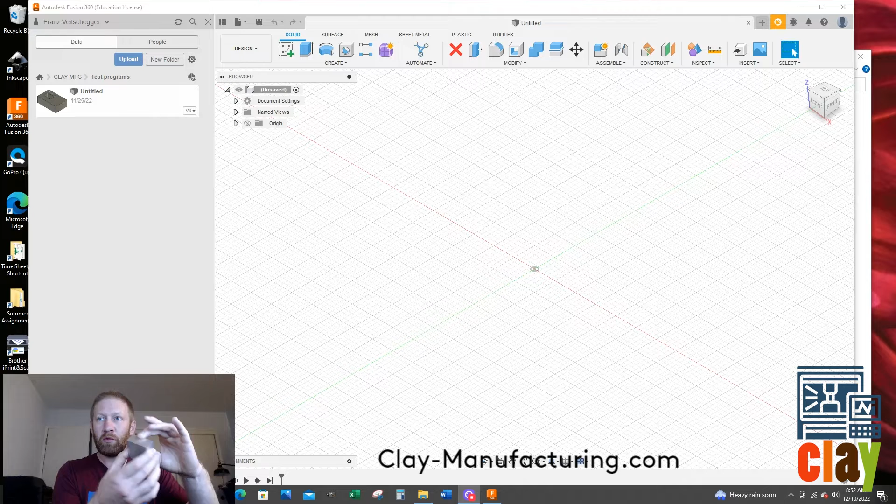And I will say this is an incredibly easy scenario because this is so thick. When it's thick, it's a square part. It's very cookie cutter. This is more about how to do it in Fusion and how to dial in the depth when I cut it on my Haas Mini Mill. And I'm going to do that all in this video.

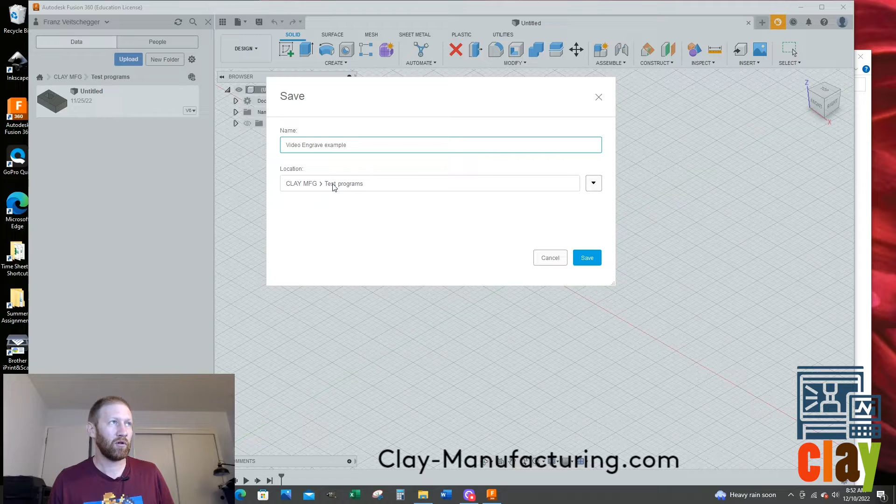So I have Fusion open. It's a brand new blank screen. The first thing I want to do is save it. So I'm just going to go save, and this will be video engrave example. And so this is going to be my folder with my test cut, my test programs, whatever. We're going to go save. So that's the first thing I'm going to do.

Now the second thing is I'm going to create a component. I'm going to come up here, right click and just say new component. And this will be, oh, come on. Computer was lagging. I'm going to say 2 by... we are still lagging. 2 by 2 alum block. Beautiful. Okay. So now I have my component.

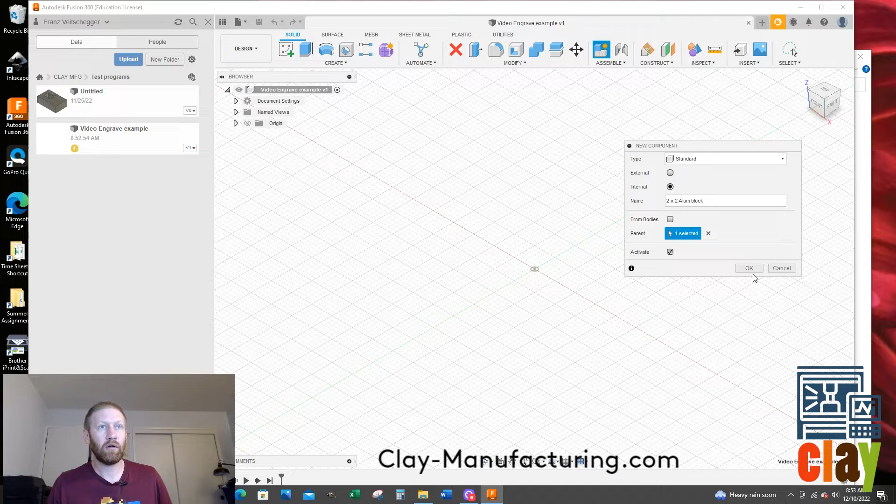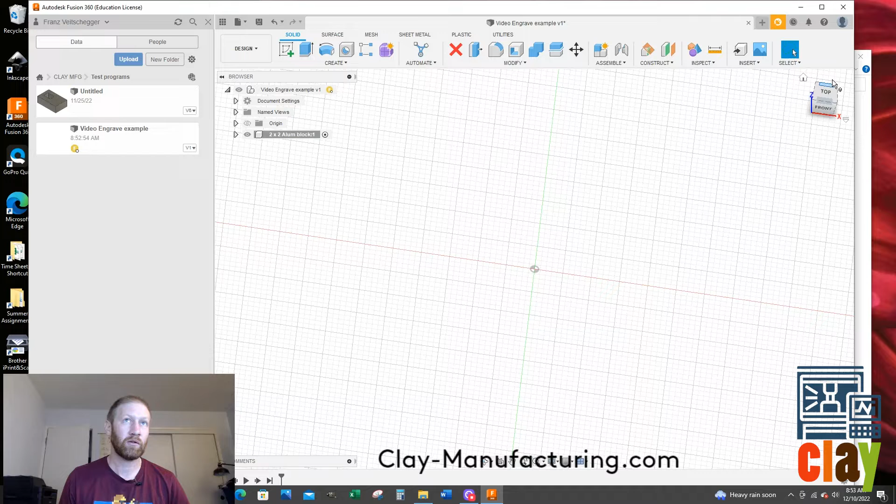It's active. The next step is I want to sketch from the top plane. This is for a 3-axis milling machine, so the spindle is coming down, so I want all my detail in the top plane. And notice I have my Z-axis going up, X is going right, Y is going positive. I clicked on my top plane. I'm going to come over here and click on my sketch. And I originally clicked on the view cube just to square me up.

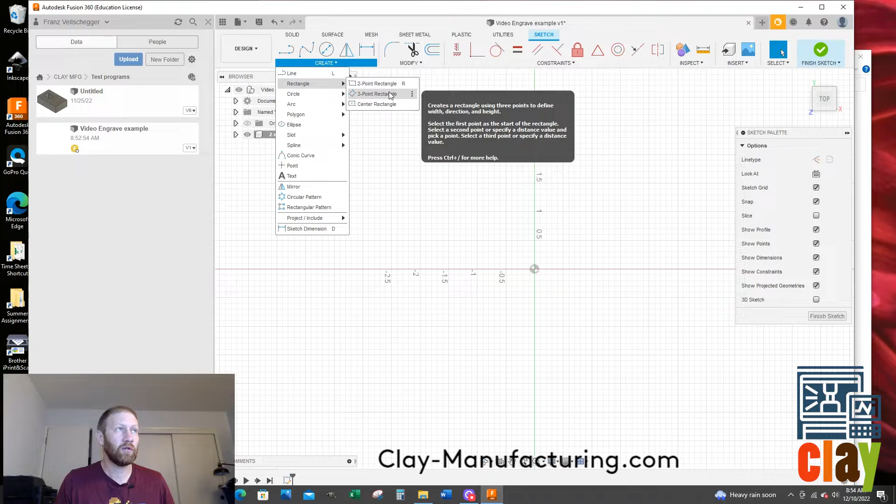I clicked on sketch, and now it wants you to select what plane you are sketching on. Since I'm looking straight from above, I'm just going to left mouse click on this. And now I'm in the sketch environment. I'm going to go to create, then rectangle, and I want to do a center rectangle. Left mouse click. I'm going to just click right there on my origin, so when I'm done, it will be fully constrained. Left mouse click and drag.

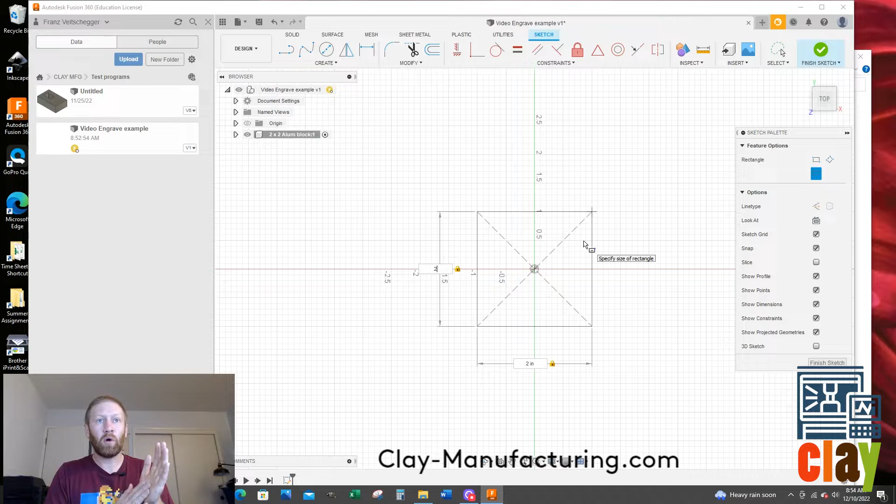And I measured my block. It's 2 by 2. So I'm just going to go 2, and on my keyboard hit tab, and it'll hop to the next box. And now I want to do 2 again. So now I have my 2 by 2 box. I could hit E for extrude on my keyboard, and it'll hop me over into a solid modeling environment. Or I could do the long, annoying way and go finish sketch, and then come over here and do extrude. But you can't really see my keyboard shortcuts, so I'm going to probably do the longer way most of the time.

If you hear weird noises, it's because I got 2 dogs in here. It's raining really bad outside, so that might be why you hear weird noises.

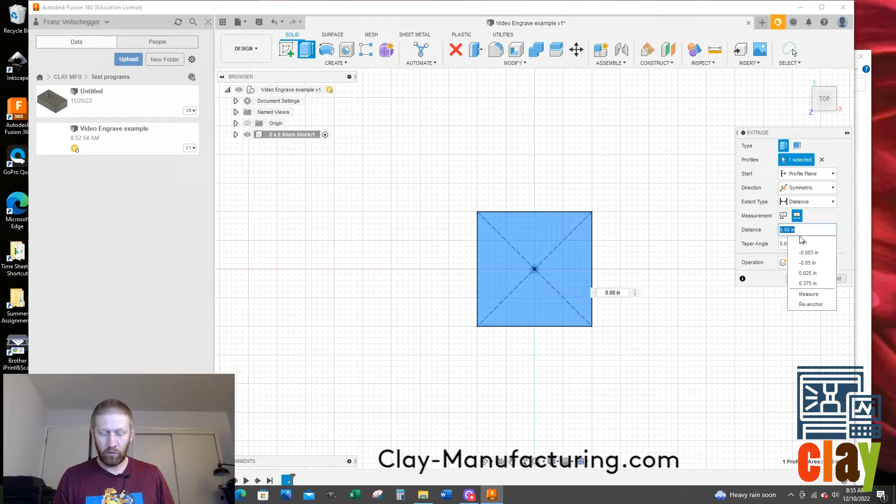For the direction, I like to model around the origin. I'm going to go to symmetric, and I want to make sure the distance that I'm extruding is the whole distance. So if I put in 1 inch, the total extrude distance will be 1 inch. So I'm going to click on whole distance. And then for the distance, we're just going to go 1. We are being laggy today. So now that whole distance is 1 inch. And I'm going to say okay.

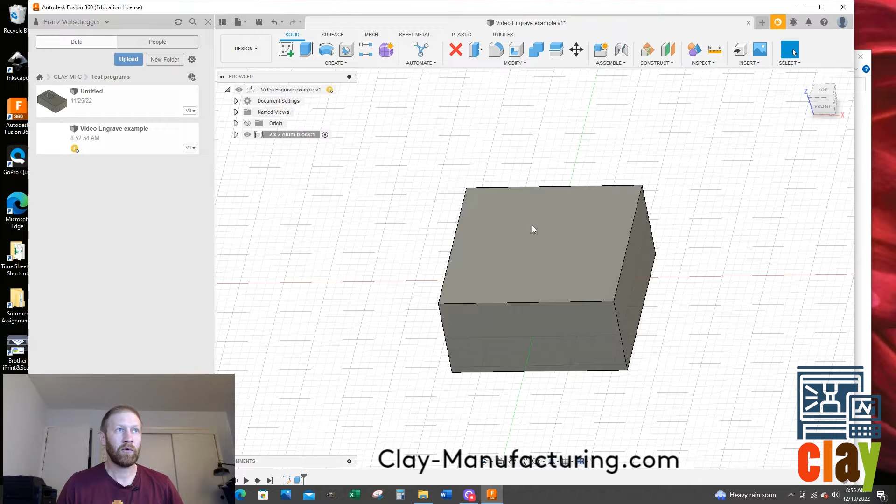Now the next is, what surface do I want to do my engrave or my sketch on? We're going to do an SVG file. If you're doing text, it's a similar way. So I'm going to right click. I'm going to go in the sketch environment.

I'm going to go create sketch. And now I'm going to find my SVG file. There's tons of ways, YouTube videos to figure out how to convert images and everything to SVG, so I'm not going to dwell on that. I'm going to assume you have an SVG, or if you're just doing text, you can come here and just start doing your text on here, and it's very similar. But we're going to do my clay logo.

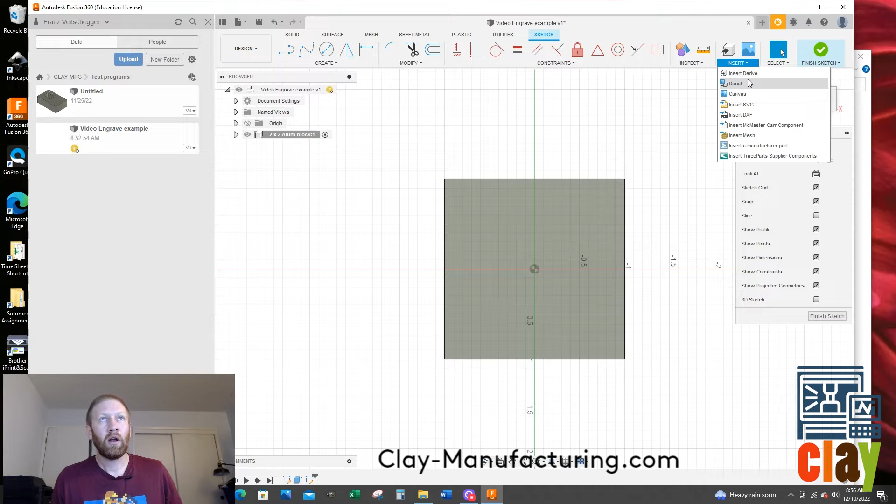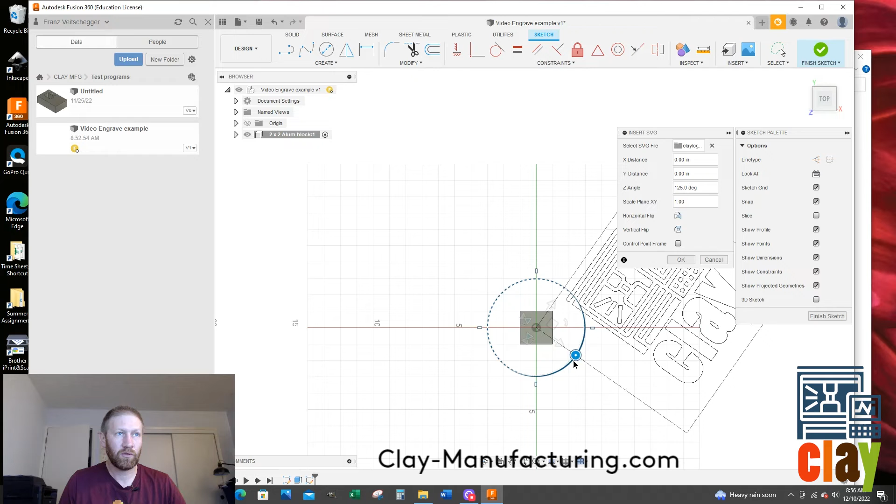So let's go. I'm going to insert SVG. I'm going to go insert from my computer. I already have it here. This is my clay logo that I'm going to do. I'm going to left mouse click and say open. And you see this comes in really big and it's rotated around. So first, I'm gonna swing this sucker around so it doesn't make me crazy. 180 degrees, perfect.

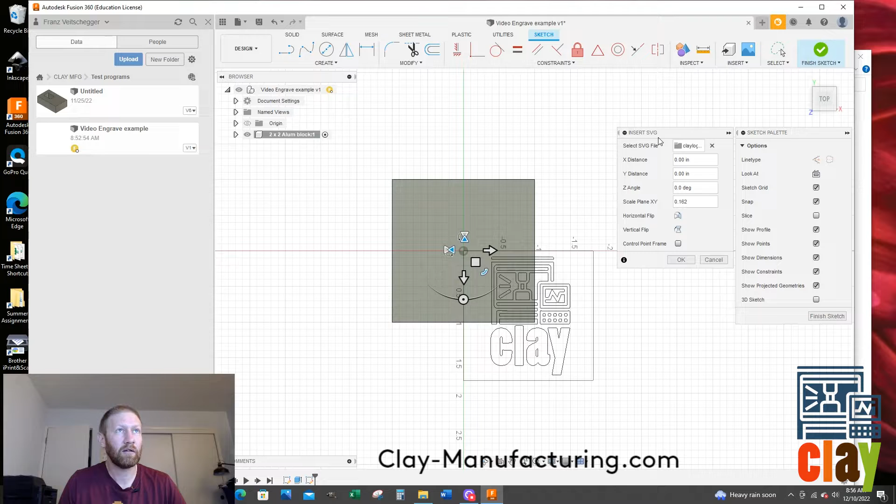And now right here, this is where I can scale the image. So I'm gonna start scaling this puppy down. So I left mouse click on it, I'm dragging in to the upper left of that square. Words are confusing for me. All right. And now this white box, I'm going to left mouse click just to drag it here to try to size it up. I'm not going for accurate dimensions or locations. This is just quick and dirty.

I'm going to drag it here. I'm going to left mouse click on here, and I'm going to scale it up a little bit. So I'm dragging to the lower right hand corner, and then I'm going to move it. I'm just going to play with that. And now down here, like if you did a chamfer around the box, and then depending on your engraved depth, it might be getting close. So let's just scooch in a little bit. Oh no.

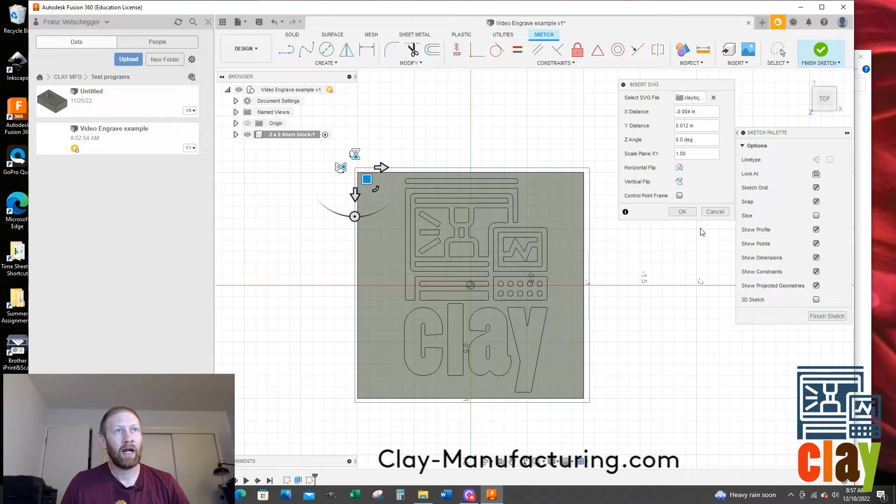I'm trying to fine tune it. All right, that's going to be good enough. I'm going to grab on here and just drag it down, and that's going to be okay. I like it. Now I will click OK. And this is my sketch. Now I don't have to do this, but I'm going to go ahead and delete all these exterior lines. And if you notice, there's also this little radii right here. So I'm just going to do these.

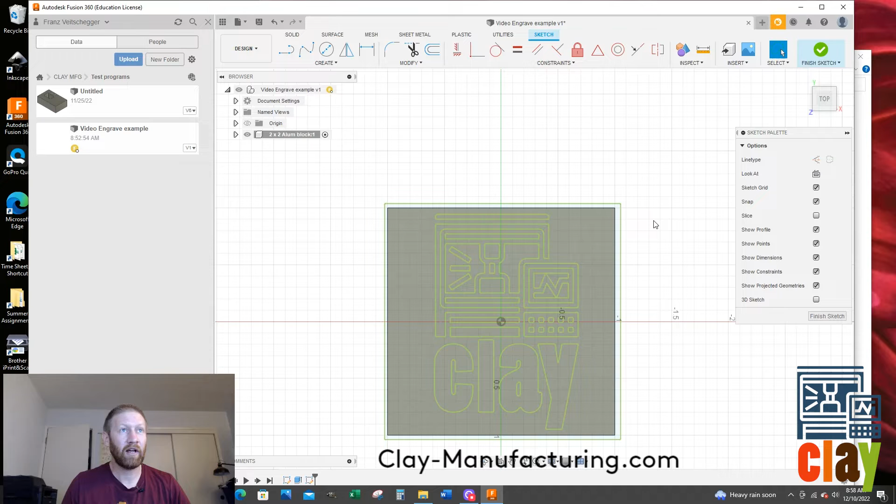I'm going to go left mouse click. Oh, I don't know why my computer is being so weird right now. I'm going to left mouse click, and I'm going to go click. Oh my gosh. What did I do? This is not cute. That is super frustrating. So I don't know how this happened.

I'm going to go window selection 1. It was like trying to draw. Let's see if this fixes it. There we go. That's what I want. I don't know why it was being weird. I want to use a box. It just makes it easier. So I'm just selecting those, and I'm saying delete. And then I'm going to create my box again, go delete. And I'm just deleting these exterior lines that I don't need. Delete. So I've just cleared all that out. It's just going to be less confusing for me later down the road.

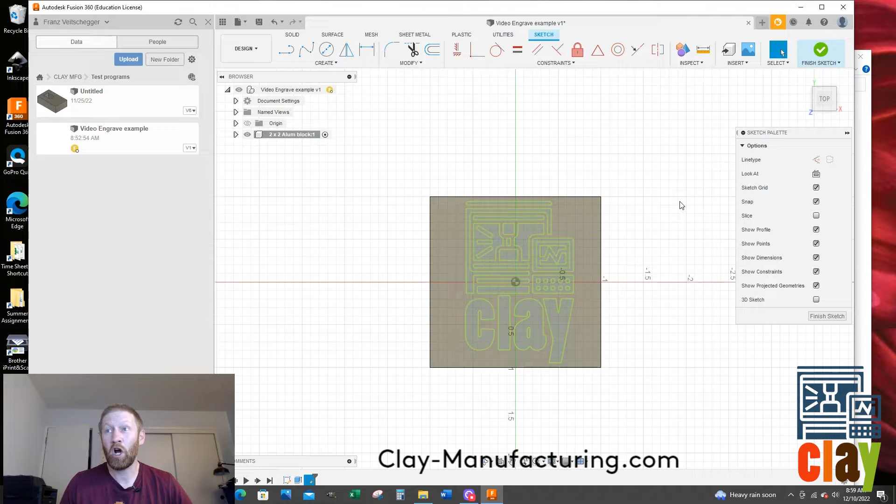So if you need to see that again, I don't know what I did. Maybe you saw it along the way. Somehow I went to freeform selection. I wanted to do the box. It's just easier for me. It's what I'm used to. It's what I prefer. It doesn't mean it's the best way or right way or wrong. It's just what I like. All right. Finish sketch. Boom. We're done. That's the extent of this part.

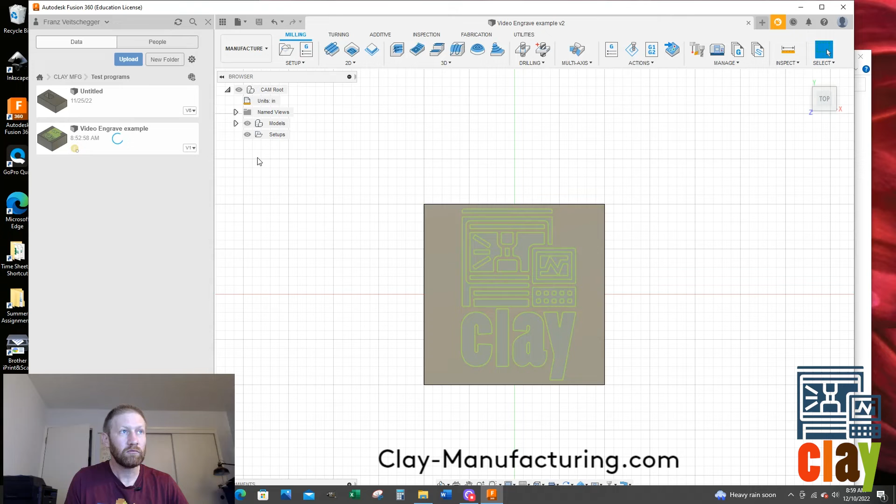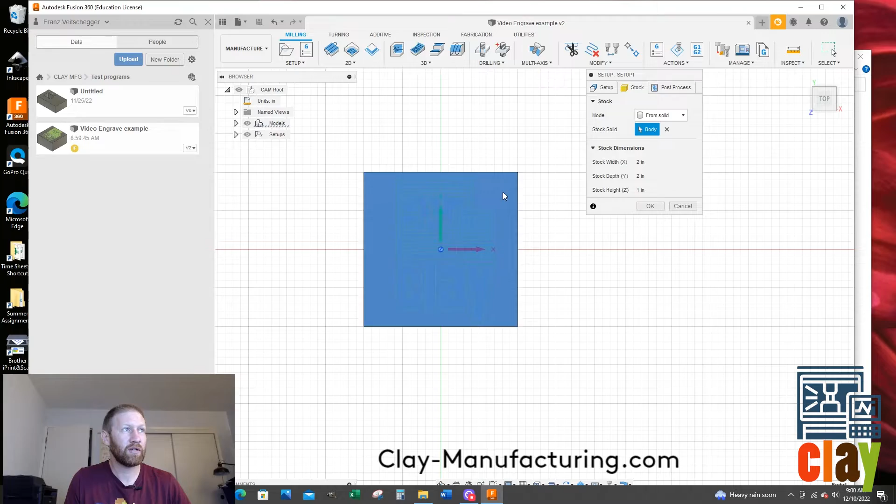Now we need to go to the manufacture environment. We are in design. I'm going to save my file. Now I'm going to go over to manufacture, and we are going to do a setup. This is going to be a very simple setup. I'm going to go setup, new setup, and I already know the exact dimensions of my box. I'm not doing any side milling, so I'm just going to go straight over here to stock. I'm going to go from solid, and it wants me to select what solid. I'm going to left mouse click on here. There is my solid.

For this example, I'll put my work coordinate system on this back left corner. So I'm back to setup, on stock box point, and I'm going to click here.

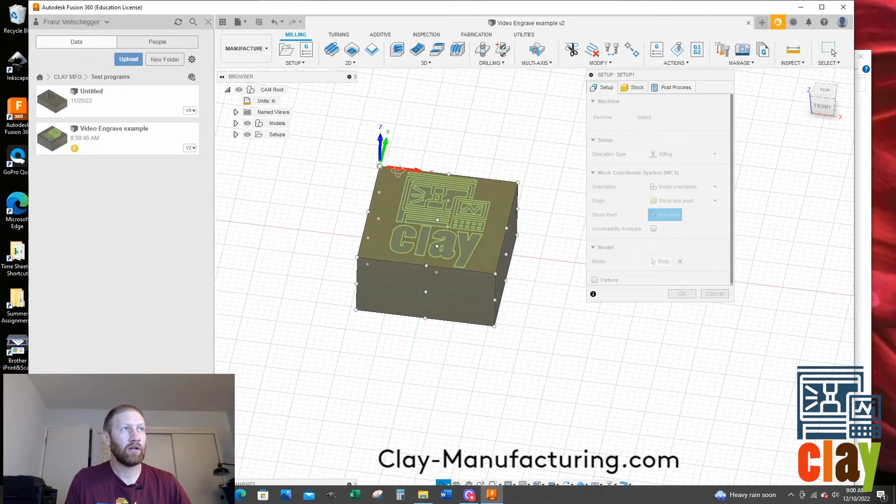You just want to make sure your Z is going up positive, your Y is going away from you positive, and your X is going to the right positive. That looks good, I'll say OK.

Now this is where I'm going to do a 2D trace. I'm going to go 2D - if I'm doing text, I also prefer this versus engrave. There's engrave right here, I always have weird issues with it. I don't use it too much, so that could also be my problem. My default is going to trace.

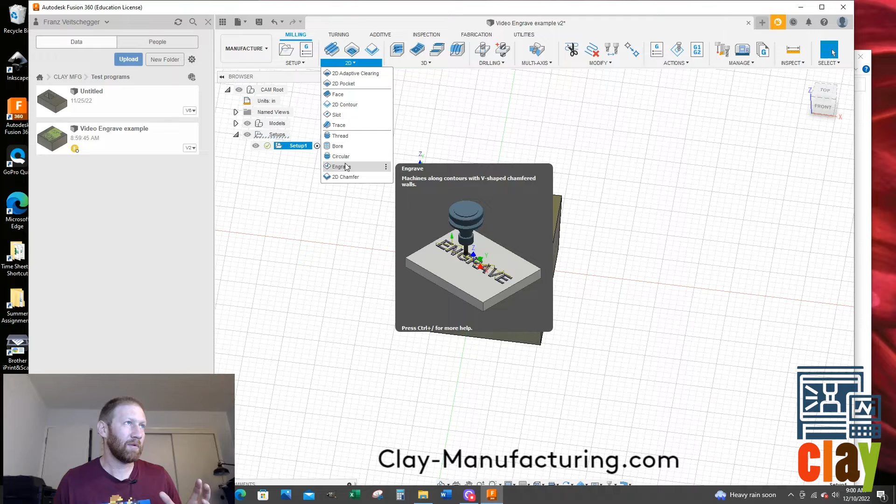So I go trace, and then we're going to go to my Mini Mill library, Clay Mini Mill. For me, here's another preference.

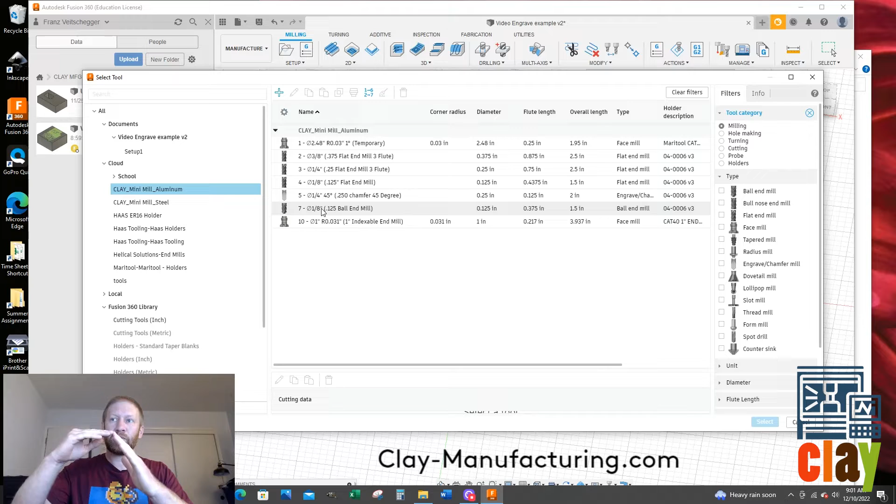I prefer an 1/8 inch ball end mill for most of the engraving that I do. It gives you a nice crisp transition from your top plane to your engraved geometry. You can also use drill bits, engraving tools, or a chamfer tool.

A lot of people will use chamfer tools, a lot of people use ball end mills. What I've noticed with a chamfer tool, if you go much deeper than like 3 thou in depth, you'll get a burr right on the edge, right on the transition. It's kind of like a little furry burr, and you can use your fingernail and scrape it off, but if you're doing lots of parts it can get annoying. It can also depend on the aluminum or material, how gummy it is.

But I've had a lot of success using an 1/8 inch ball - if you machine something, send it off to anodize, bring it back, and just want to engrave a logo in it, it will leave you a nice crisp edge. So that's what I prefer. There's a lot of ways to do it.

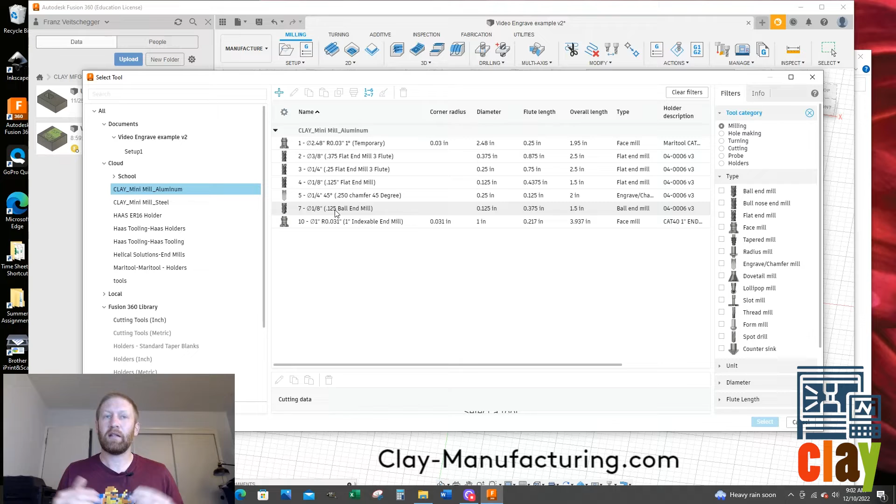So I will select my 1/8 inch ball end mill, and I will go select. My defaults are 6,000, that's as much as my spindle can go - really, I would spin it as fast as you can. So 6K RPM, I'm just going to go at a linear feed rate of 15 inches a minute.

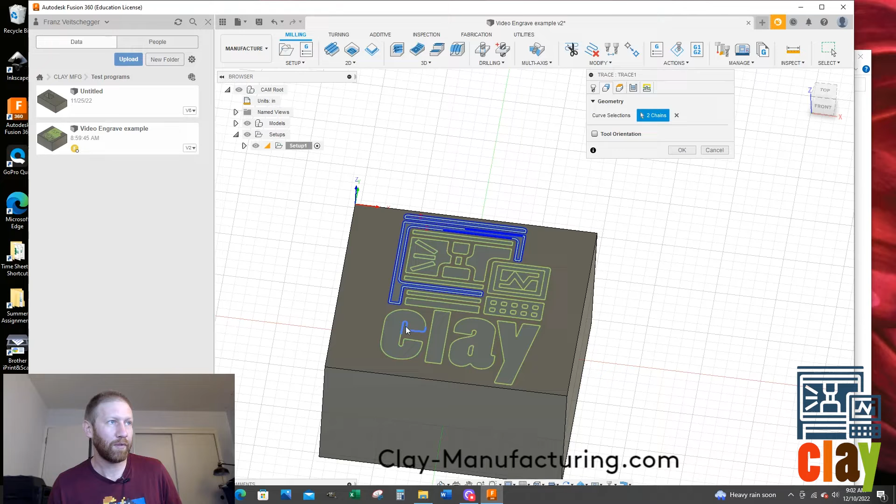Geometry, it's as simple as - let's see if I can do this. I'm just going to go through and select this. I was trying to see if I could do a box, if I can select it easier, shoot it in the comments, because I am going the slow way apparently.

So I'm just going through here clicking. I'm sure this part's really fun to watch me click all these boxes. I'm sure there's a simpler way to select it, and I'm failing you right now.

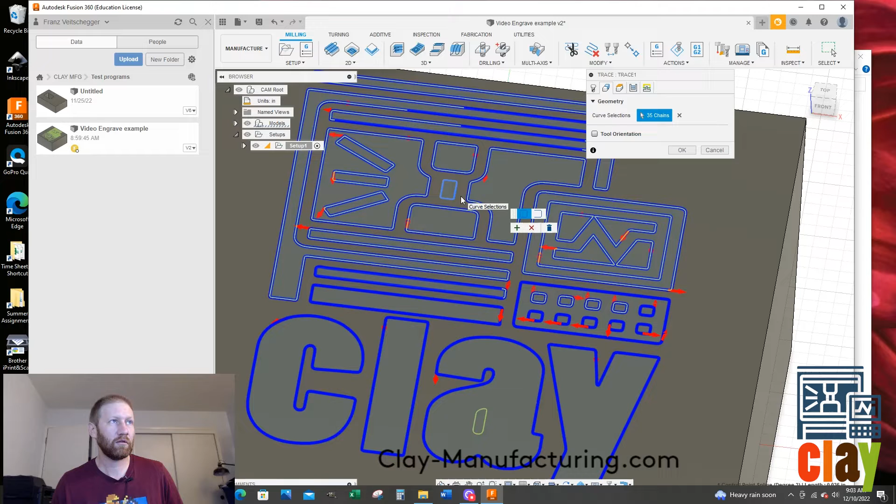Let's say you selected something and you're like, ah shoot, I didn't want to select that - I'll just left mouse click on it, and usually it lets you get rid of stuff. It depends - when I'm doing an adaptive or a contour, usually you can just left mouse click on it and it'll deselect it. That one I actually had to throw away, so I do want that one.

Now those are all selected, and then we're going to go to heights. I leave all these defaults unless you're trying to speed up your machine time where it's not in the air so much - you can get it closer, like rapid, closer to the workpiece. For this, I'm not concerned about time.

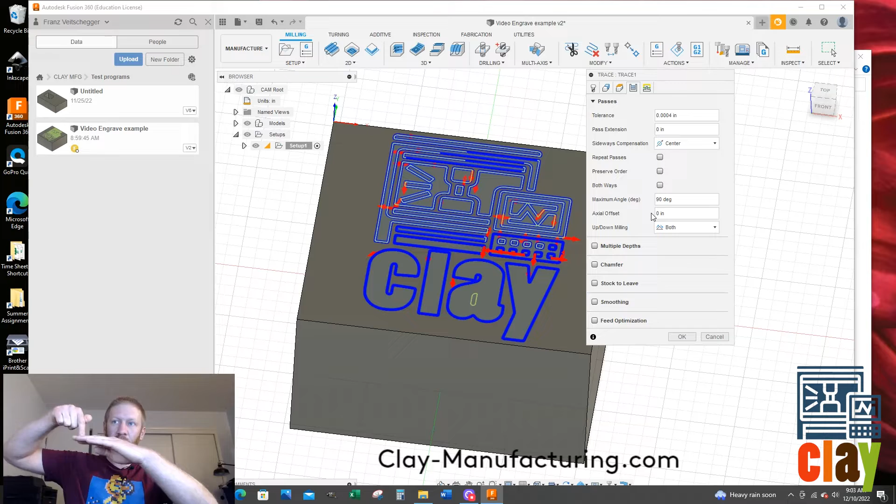Axial offset - this is what I use to set the depth of my engrave. The axial is under the tool, and I just start out very shallow. I'm going to go negative 0.001, we're doing 1 thou. Later on the control, when we run it, if we want to go deeper, I'll do it on the control. You could even leave this at 0, and then on your control you could run it.

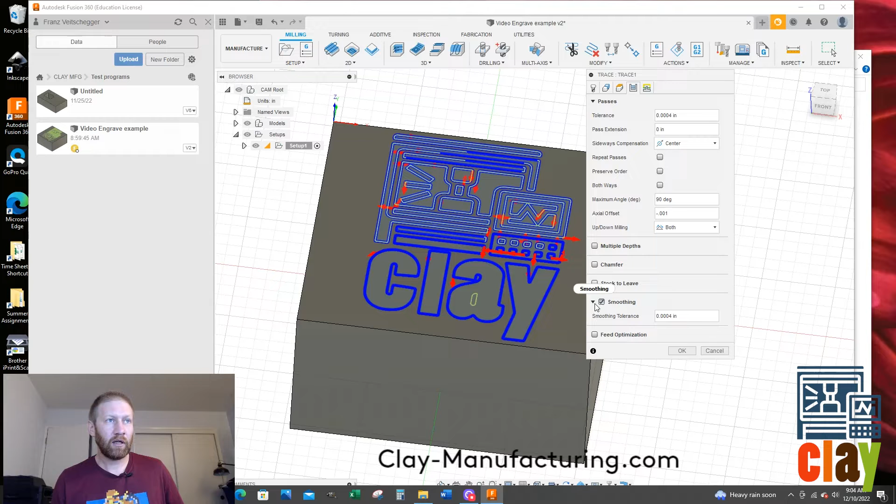And I'm going to do smoothing and leave my default feed optimization. I'll say okay - so that is really it. Let's see, there's a few things I probably skipped over.

Dang it, they were just in my little brain. But this is what I will use to do the simulation. I'll go on the control, I'll run it. If I want it deeper, I'll do it.

Now, if you're using thin material, face mill. This isn't going to be a face mill pass, this is just for demo. But if you're doing thinner material and doing facing operations, you'd want to do your facing operation first, come back, and then do your engraving.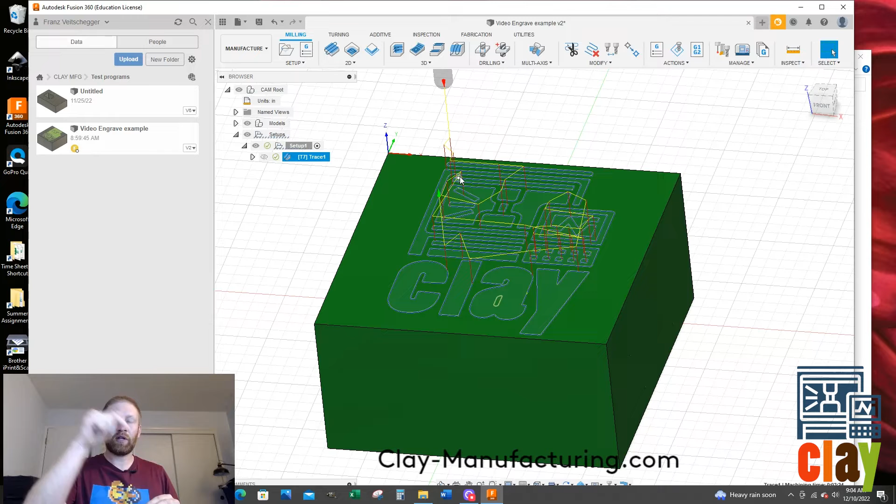Some tricks I do too: I'll do a facing operation, still leave a little bit of stock, then do engraving. Like if I'm using a chamfer tool that I know will leave a burr, I'll engrave through the stock to leave my correct dimension. Then I'll come back again with a face pass and knock off all those burrs so I don't have to do anything by hand to clean it up. So that's another way to go.

But usually you want to leave engraving until you've machined the surfaces so they're nice and flat and still clamped in the vise. Because once you unclamp and clamp, you're flexing that material, and we're not working with a whole lot of depth. Like 1 thou is usually just enough. So if you're flexing your part more than 1 thou, you'll see deviations or highs and lows in your text. Like our coaster one, say you machined this out, took it out of the vise, got it anodized, came back and clamped it.

This is so thin that when you clamp it in a vise, it's going to bow up a significant amount. And then when you touch off your tools, if your Z is up here or down here, it's going to have like a 7 thou difference from here to here, depending on how much pressure you put on that vise. And if you have a Kurt vise, it's very easy to bow this a ton.

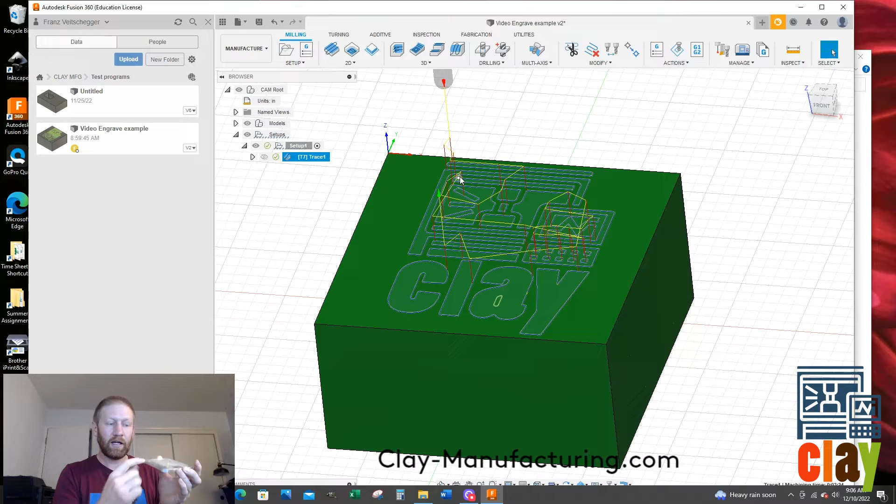I showed you how to bring in an SVG file and create a tool path. You can use all sorts of different types of tools. I prefer using a ball end mill.

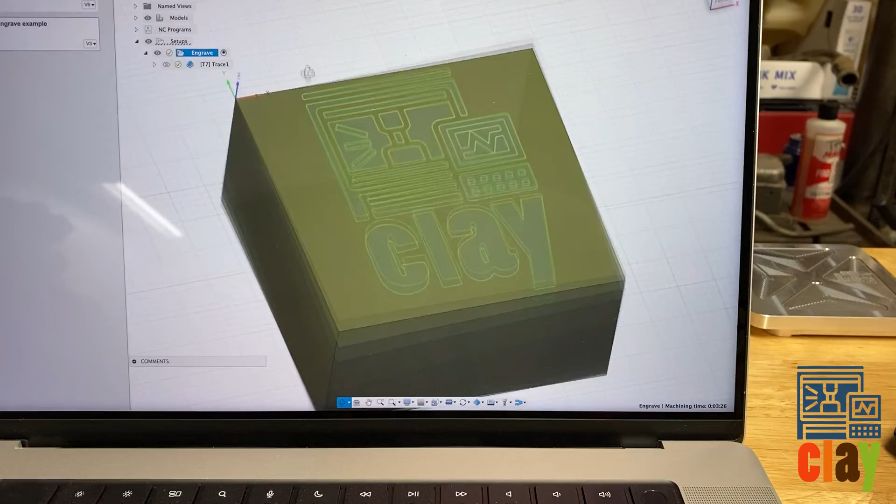And I created my model. If I click on here, this is my X, this is my Y, and this plane right here is my Z0. We're only going to go down a depth of 1 thou, negative 0.001 on the axial.

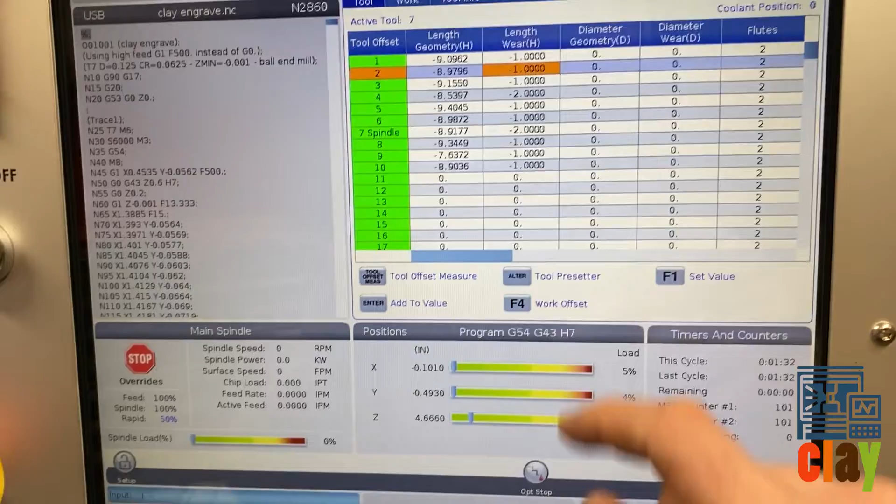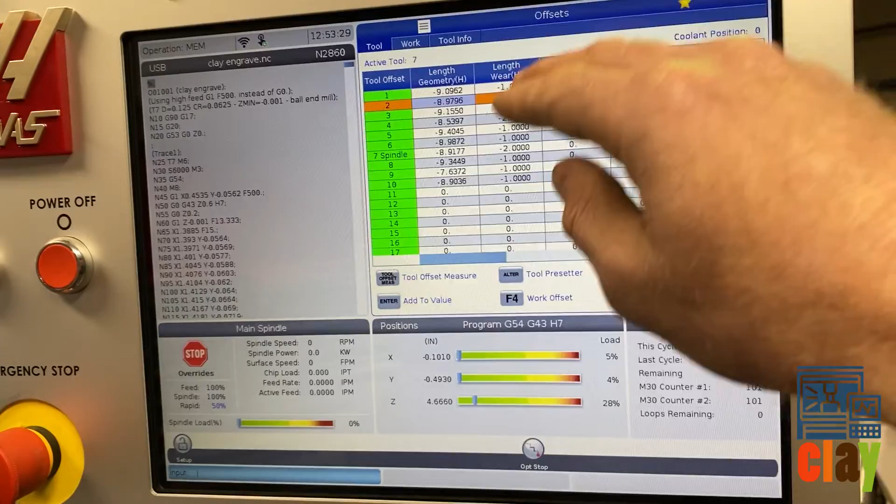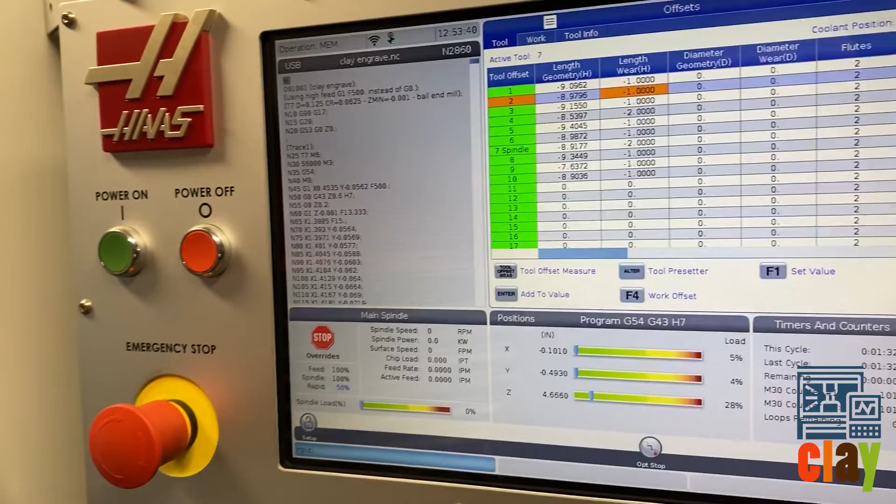And then if we want to go deeper, we're going to come over here on my offset on T7, and we'll drive it down deeper using a length wear. That's real common if you're using a chamfer tool. Say you have a broken chamfer tool, you'd put a positive value in here, back it up, run it, see what your chamfer looks like, and if you need to go deeper, add negative values here to start driving it down to hit your precise chamfer, or if you're trying to hit a nominal size if you need to flip a part.

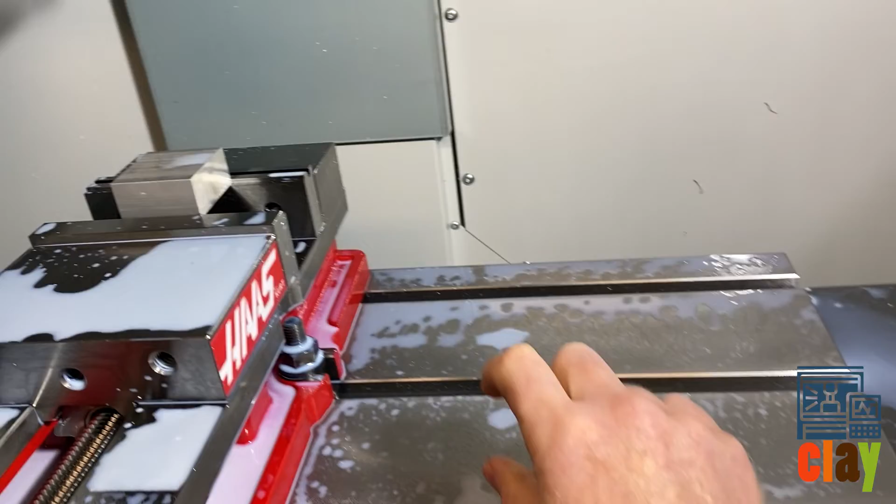So let's kind of go over this. This is my ball end mill. I use a tool setter to set all my tools here. I use my Haimer to touch here and find the difference between here, and this is my zero plane. That's just how I touch it off.

Some people, they'll just touch everything off of your workpiece. I don't like that method, but you can do it. Let's see what else.

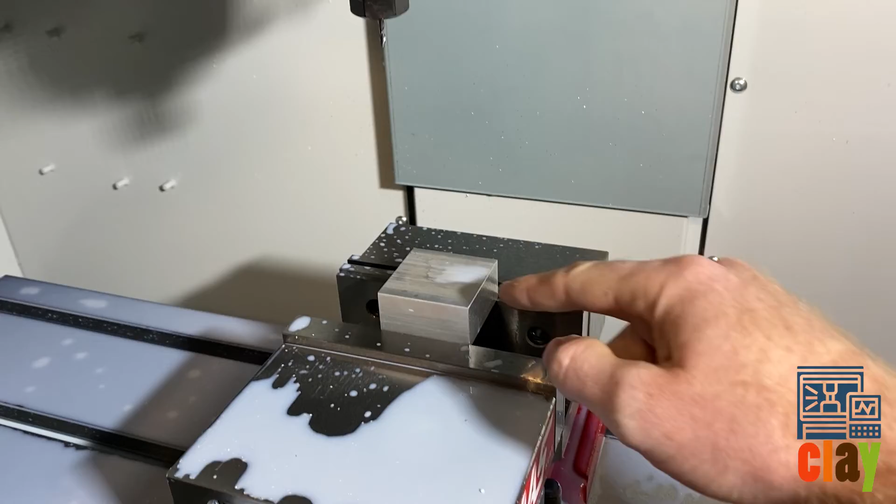So yeah, we're not going to do a face pass. This is a big, thick chunk of aluminum, so there's not much flexing going on. You're going to do it and be like, oh, I'm a genius, I'm an engraving genius. But thick material is relatively easy. If this had saw cuts on this surface, I would do a face cut and then engrave it. But we're going to try just engrave right on there without any cleanup.

So let's do this. To post my program, if you don't see the yellow box or your work coordinate system, I do one click on here.

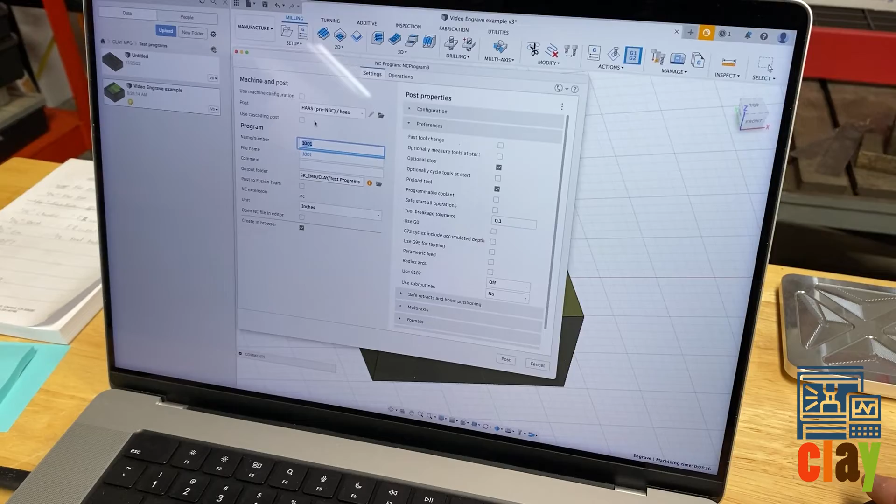Now you see the yellow box in your work coordinate system, then you do actions, post process, and I use the Haas pre-NGC here. I won't change this number, but I'll change my file name and my comment. This is just the folder you're outputting it to.

I'm not going to post it now, and I would come down here and go post if I was trying to, but I've already done that. I've already ran it through my graphics, and it all worked out, so we are going to run it.

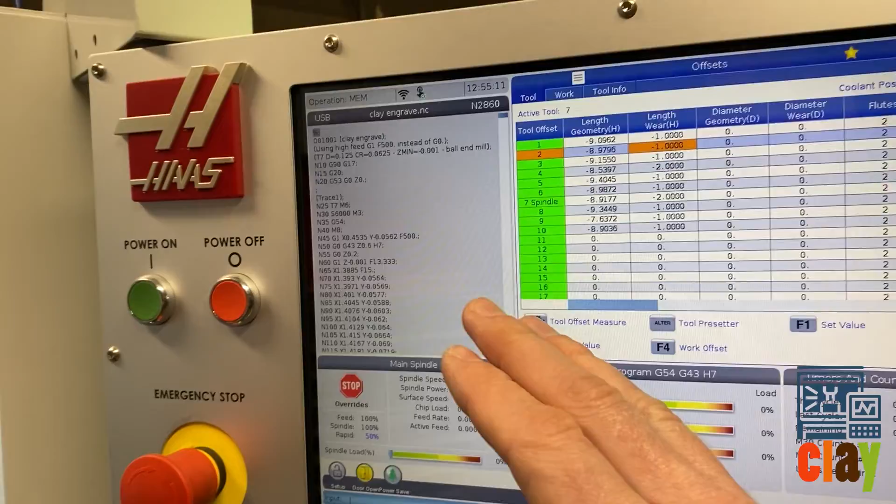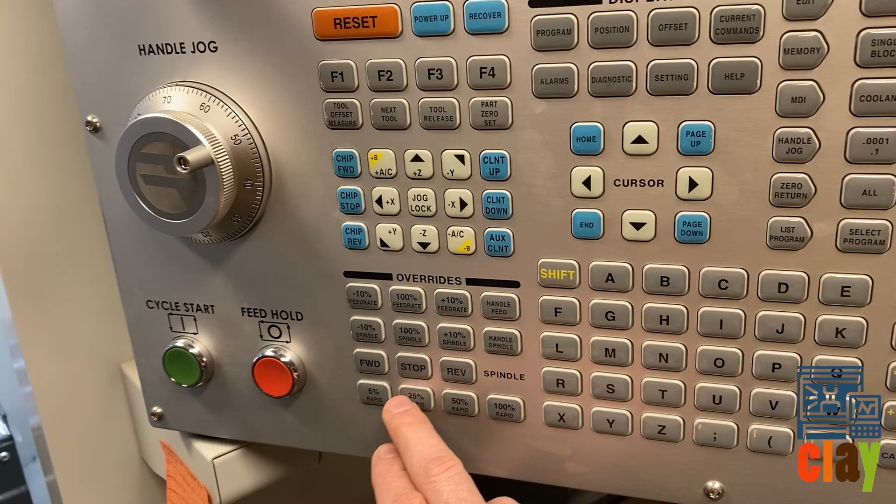So I go memory, I do optional stop, and then I usually will play with my rapids. If you're just starting out, I recommend 5%, but I'll be going back and forth between 25 and 50 if I've got to do tool changes.

Let's rock and roll, we have our program. When this is white, it means it's live. I'm going to put my camera in there, but let's get it going.

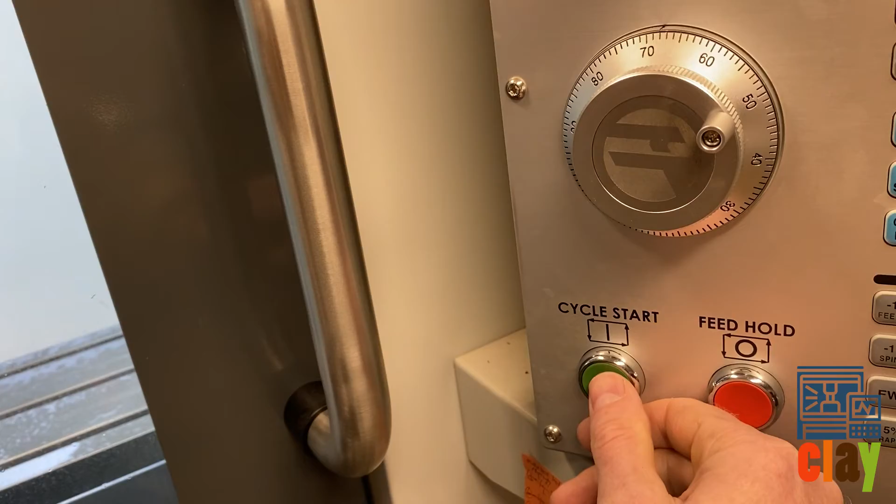I'm gonna hit cycle start. As soon as I hit cycle start, I'm just gonna hover my finger over feed hold. Don't hold your finger—use two hands to hold over both of these until you get very confident, because chances are you're gonna forget which one is which if a crash happens. So I'm gonna go cycle start, and I hit feed hold.

When you hit feed hold, that stops your linear feed movement. I'm gonna turn my coolant off, hit this button, but you notice the spindle is still spinning. To stop my spindle, I could go stop.

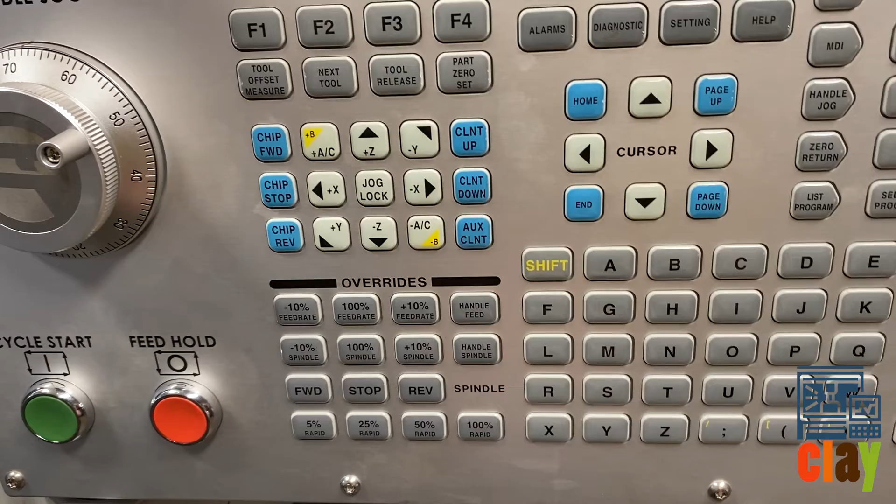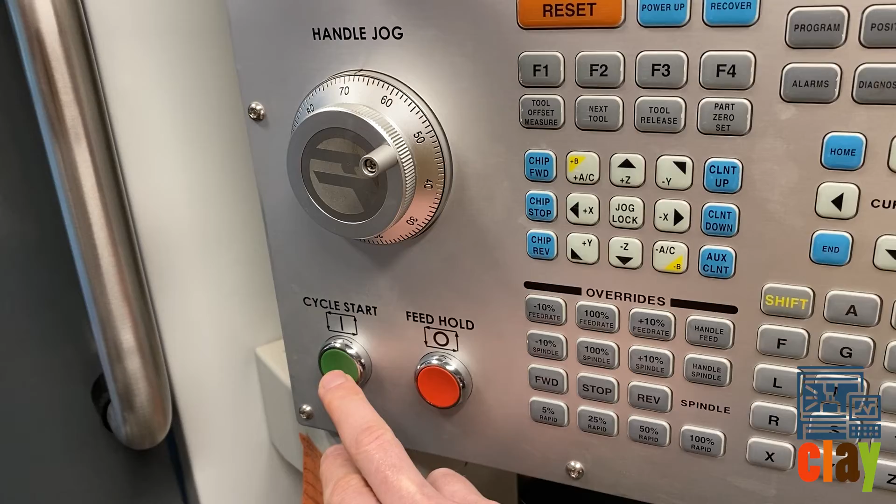I have the coolant off there, I'm gonna leave that off, and then I'm gonna put the camera in there. As soon as I hit cycle start, it will pick up the RPM where you left off and the linear feed. To turn coolant on, you have to manually turn it on. But I'm gonna turn it off for this because I'm gonna put my phone in, and hopefully I don't get anything messed up. So let's try this.

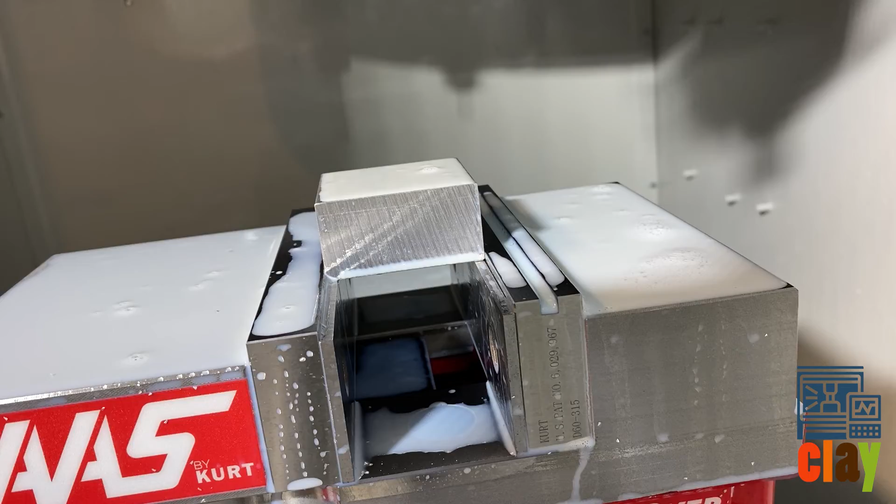We are going to plop you right here. Please don't mess up. And then, I don't know if you can hear my audio now through my glass, but we're gonna try.

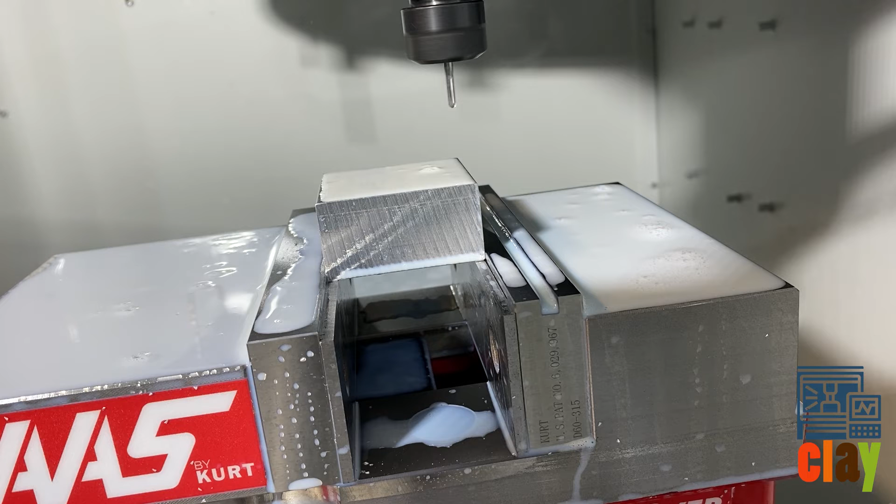I'm gonna do 25%, cycle start. And then I'm gonna do a feed hold. I'm looking at my position. I'm gonna stop my spindle right now, actually.

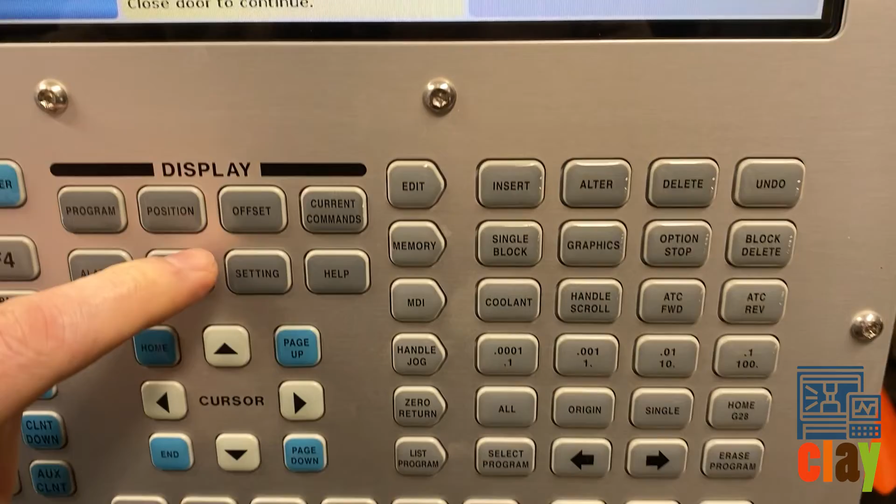I go to position, and then I go to program. So I'm gonna cursor on over. This Z value, almost 3/4 of an inch, that's how far from the tip of my tool to the top of my Z plane the tool should be. I've been doing it for a while, so I can tell that's about 3/4 of an inch. If it's off plus or minus 10, 20 thou, you're not gonna catch that here, but you'll catch major crashes here. So let's pop you here, and we are going to try this.

This is at a 15-inch linear feed rate at 6,000 RPM, which is my max spindle speed for this. And you could play with your plus or minus 10% feed if you wanted to.

We're gonna look at it now. Let's move you, I'm just seeing what we're doing. Cool, so that's looking nice. You can see it's engraving, that's only 1 thou. And let's put you back.

Actually, I'm gonna shoot a little coolant on it. This video's starting to run longer than I want. We're gonna splash some coolant on it—I don't want my phone getting splashed with coolant, so. Alright, I think that's good enough. Good enough for free internet videos, right?

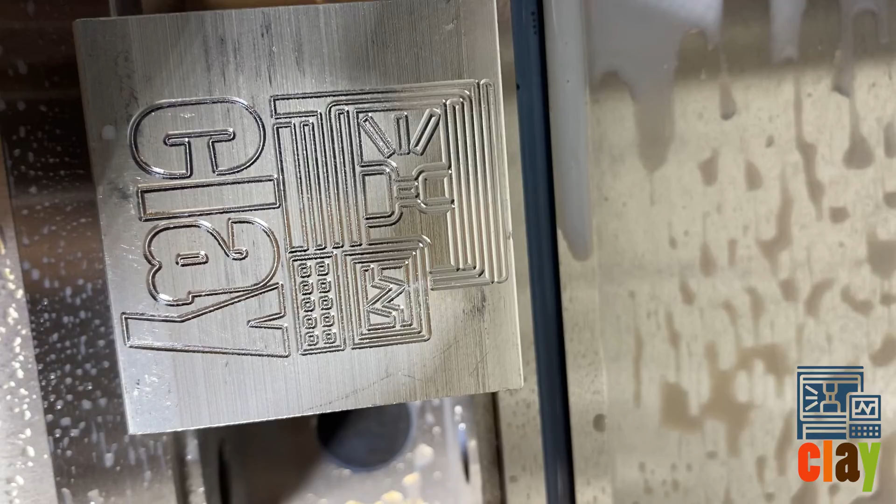All right, here we are. I have gone down another 1 thou, a negative 1 thou, and you can tell it's much deeper in the middle. It's going to be deeper on the ends as well, but it kind of cleaned that up in there, and that is just another negative 1 thou.

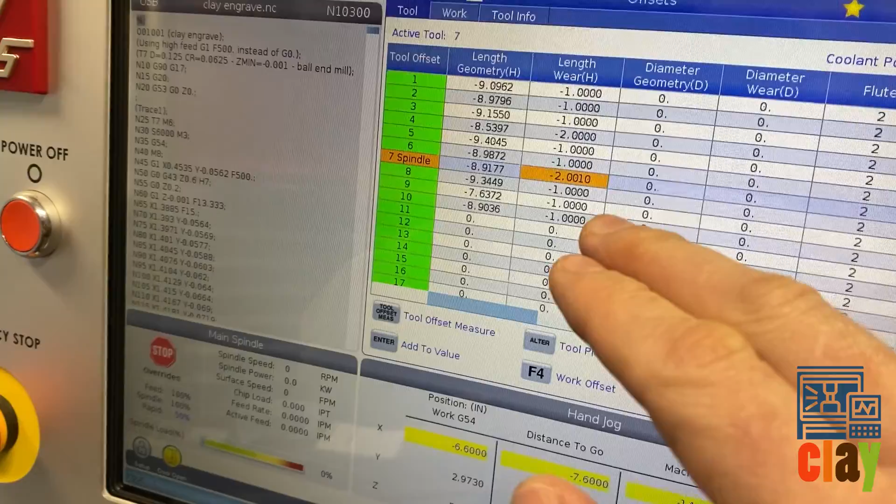I subtracted the thou right here at my length wear column. You might have different values in here, like I have 1 and 2—that's how I set up my tools, but I did the negative thou there. And in my program I had negative 1, so that's a total of about 2 thou without using a face mill. Hope this helps, have a good one.